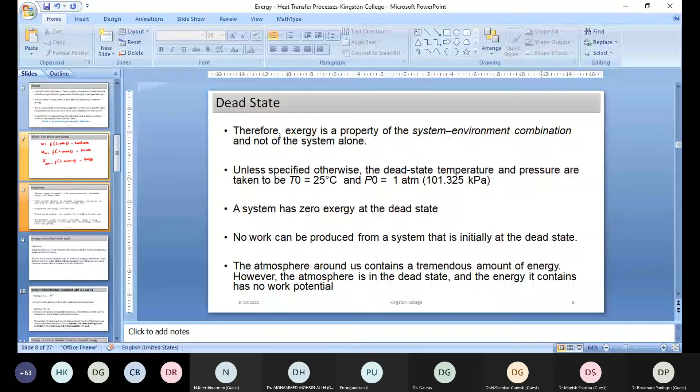Now you can say that the Exergy associated with the work is the work that can be obtained from an amount of energy converted in a well-defined system under ideal conditions. That means applying reversible processes, using the environment only as the reservoir of heat and matter. Under such conditions, we say that is the Exergy or the useful work content of the system.

And so that is about the work potential. Now, if you talk about the exergy associated with kinetic energy and potential energy, the exergy of the kinetic energy is given by half V square per unit mass, where V is the velocity of the system relative to the environment. This is something you need to understand.

And the exergy of the potential energy is given as Gz, where G is the acceleration due to gravity and Z is the elevation of the system relative to the reference level in the environment. So the exergies of kinetic and potential energies are equal to themselves and are entirely available for work.

However, if you consider the internal energy and enthalpy of a system, they are not entirely available. Certain amounts of deductions take place from the internal energy if it's a closed system, and from the enthalpy if it's an open system — it's not entirely available for work. I did not discuss closed systems here because I hope those were already discussed before.

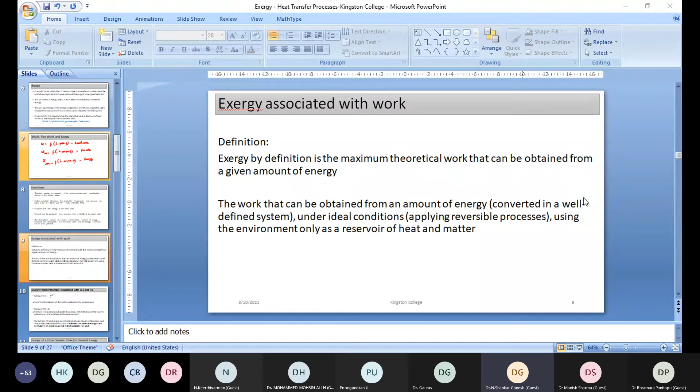Sorry to disturb, ma'am, your slides are not changing. Can you try again, ma'am? I did not change the slide. What is the slide you are seeing? I think it is slide number 9. It seems exergy associated with work, definition, it remains exergy same, associated with the flow, with work. Now it's changing, yeah now it is changing. Okay, so I'm showing it like this. Actually, now in slide number 13 it seems, but earlier we were in 8th slide, after then there is no change in your slide. I have some problem with this Microsoft Teams, so it looks like the issue is continuing here also. What I'll do is I'll not go by presentation mode and I'll show it like this. That would be better, thank you. Okay, yeah.

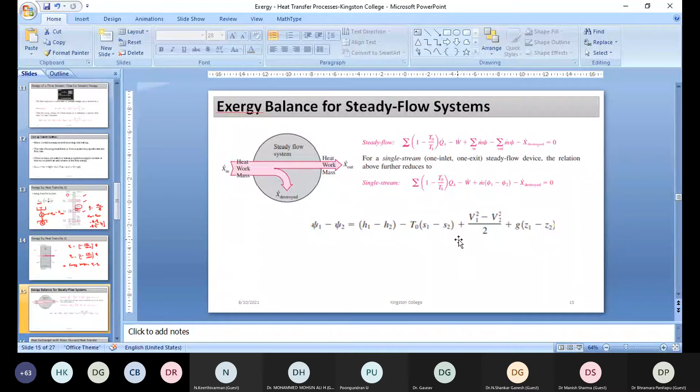So now I have kept one simple exercise for you so that you can understand how to deal with exergy transfer processes associated with heat transfer and flow as well. The reason I have focused mainly on open systems is that if you look at most thermodynamic systems, they are all open systems.

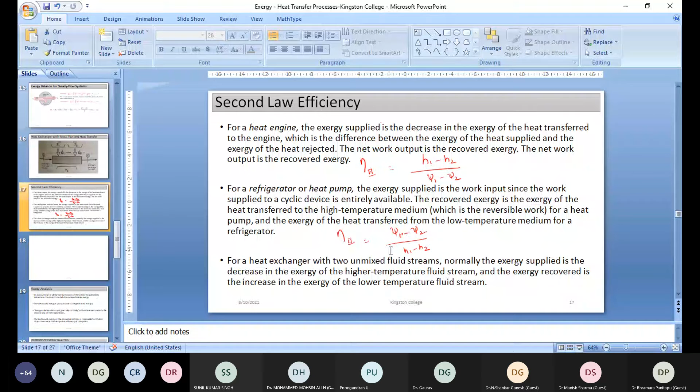For example, if it is a heat pump, the exergy supplied is the work input which you supply. This is what you have in the denominator, the work you supply. And the recovered exergy is the exergy of the heat transferred to the high temperature medium, and that's what we keep in the numerator. That's how we calculate the second law efficiency associated with the heat pump.

Now, for example, if it is a heat exchanger, what we do is consider that you have a hot fluid and a cold fluid. The hot fluid enters at some temperature and leaves at some temperature, and the cold fluid enters at a temperature and leaves at another temperature.

So whatever is the net exergy transfer associated with the hot fluid, and you can take the net exergy transfer associated with the cold fluid, the ratio of that will give you the second law efficiency in case of the heat exchanger.

These are typically the systems which you come across. Once you could calculate these exergy parameters for the heat transfer process as well as the flow process associated with the heat transfer, you are now ready to do the exergy analysis for a given system.

By accounting for all exergy streams of a system, it is possible to determine the extent to which the system destroys the exergy. The destroyed exergy is proportional to the generated entropy, and the exergy is always destroyed partially or totally, as stated by the second law of thermodynamics. These are typical facts about exergy analysis.

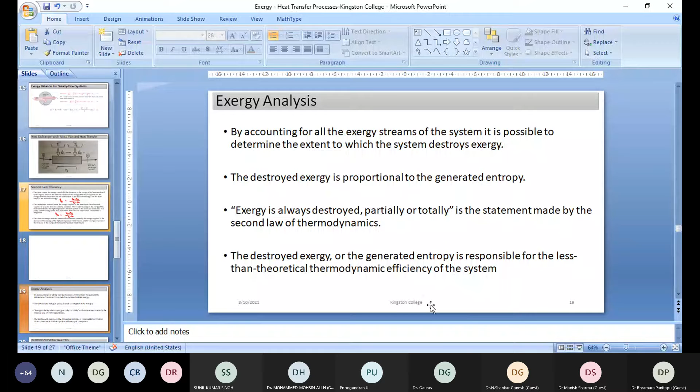The destroyed exergy or the generated entropy is responsible for the less than theoretical thermodynamic efficiency of the system, and that's what you are calculating using the second law efficiency.

Why do you have to calculate the exergy analysis? Because you need to determine the exergy losses, the true thermodynamic losses in processes as well as in systems. If you know them, you can look for the means to minimize the losses and optimize the driving forces. We'll try to take one example and see that.

By performing exergy accounting in smaller and smaller subsystems, you can draw a map of how the destruction of exergy is distributed over the engineering systems of interest. In this way, we are able to pinpoint the components and mechanisms that destroy the exergy the most, by making a map of the things.

You should also have the understanding of where you can apply this optimization so that it is also economically beneficial. That also needs to be taken care of while performing the exergy analysis.

The real advantage in search of improving the efficiency is because you can do it by finite means. For example, you have one heat transfer taking place into a system. The heat transfer does not take place as we show it in the thermodynamic system just like that. It has to pass through a mechanism through which it happens. So wherever the exergy loss is taking place, if you could address that, the efficiency increases thereby, by finite means.

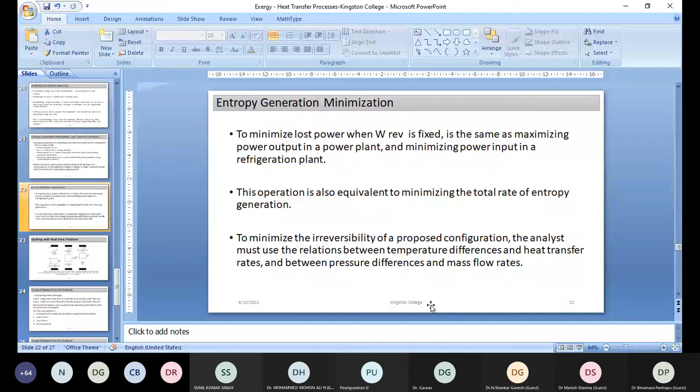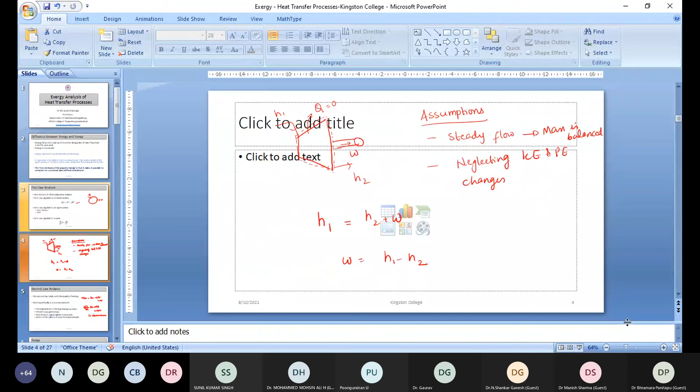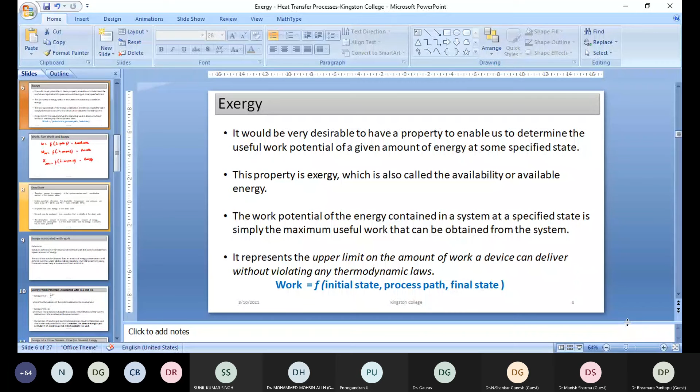The need to understand the first law analysis before going up with the exergy analysis, and the need to understand the second law analysis because entropy generated is nothing but the exergy destroyed. And what is the exergy? How do you calculate the exergy associated with the work transfer, and what is meant by the actual work, and what is meant by the reversible work, and what is meant by the exergy of work transfer?

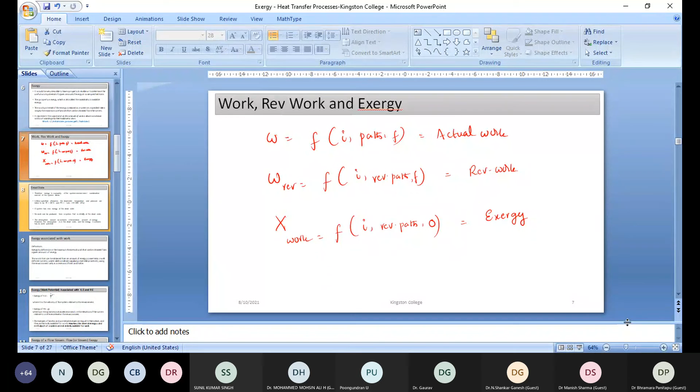And then exergy associated with the kinetic and potential energy changes. Why we don't have these terms v squared by 2 and gz—they don't change when you calculate the flow exergy, whereas the exergy associated with the enthalpy in the flow system or the open system and the internal energy in the closed system, they are reduced, they are not totally available.

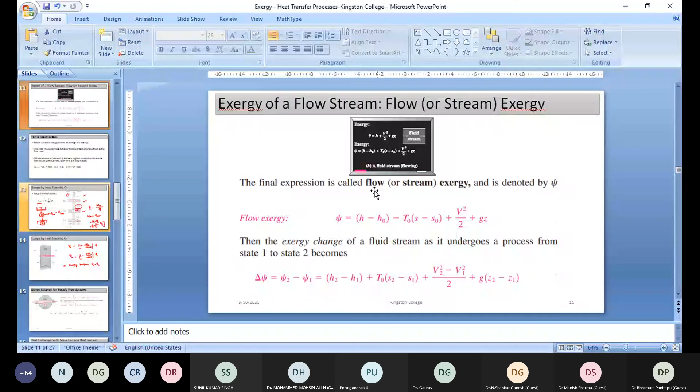Okay, you can see that in case of the exergy of the flow system, the exergy transfer associated with the mass transfer is just the extension of it. And then exergy transfer associated with the heat transfer, how do we calculate it?

It is nothing but, if you have a heat transfer taking place at a given temperature, it is like running a heat engine between that temperature and the dead state and calculating the useful work out of that. So that is nothing but the exergy associated with the heat transfer.

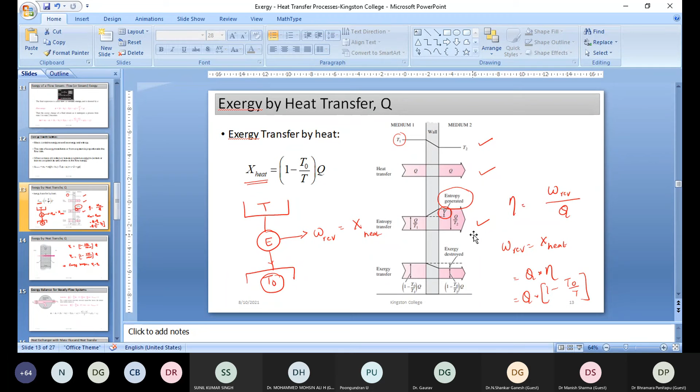And this particular figure clearly gives you, when the heat transfer is taking place between two different temperatures, how the heat transfer is taking place, how the entropy transfer is taking place, and how the exergy transfer is taking place. And we try to do the same, taking one example of the steady flow energy system.

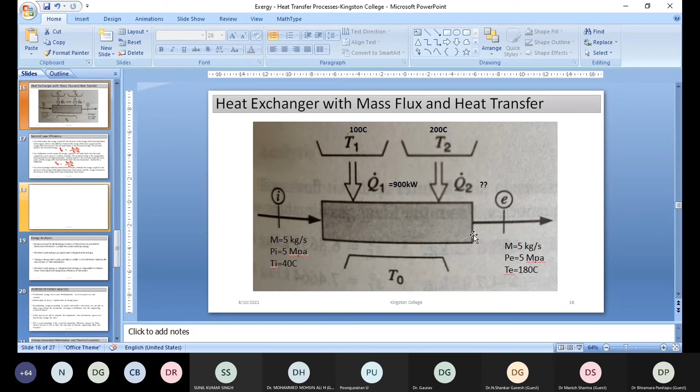I actually tried to solve this problem along with you, but because of the problem associated with the presentation, I could not do that.

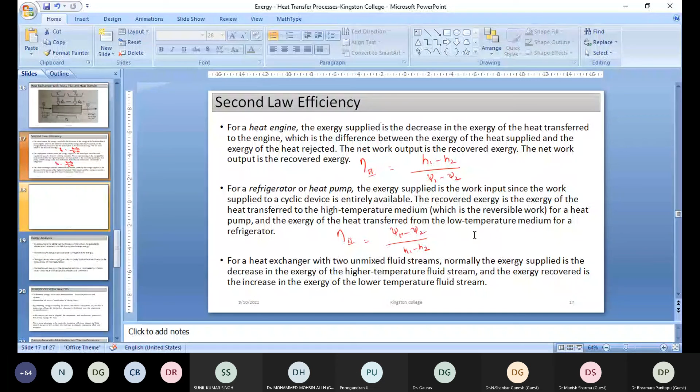And then the extension of it, once you calculate all these things, is to calculate the second law efficiency. Once you calculate the second law efficiency, it will give you the scope available for improvising the given system associated with these interactions. And then what is the purpose of this exergy analysis?

How do we minimize the entropy losses, and how do we identify the scope, or identify the devices, or identify the interactions where the entropy generation is taking place, and how do we maximize the work output in case of the heat engine, and how do we minimize the work input in case of the refrigerators or heat pumps, so that you can minimize the entropy generation.

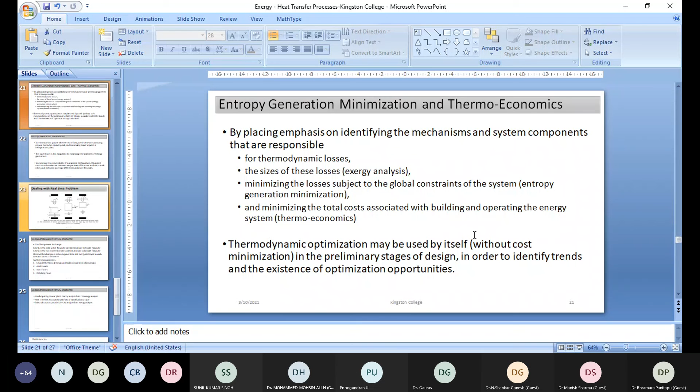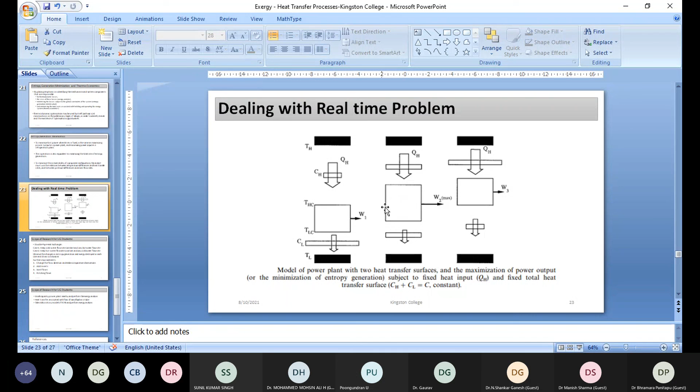And how do you identify that this is where the problem lies, and this you have to minimize. So you have to reduce the losses as much as possible to see that the work output is maximized. Once the work output is maximized, automatically entropy generation will be minimized.

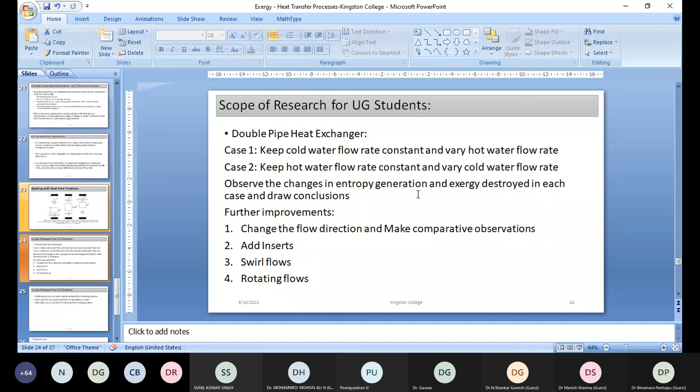And based upon that presentation, I tried to show you a couple of research problems for the UG students as well as for the PG students. So if you have any questions or if you want any further aspects to be discussed, I would be very glad. With the given constraints, I will try to do so.